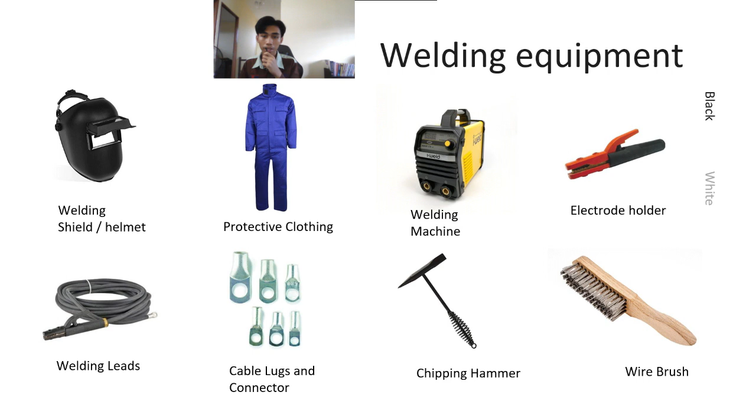So, for the welding equipment, what we need is first, a welding shield or helmet, protective clothing, welding machine, electrode holder, welding leads, cable lugs and connectors, chipping hammer, and wire brush.

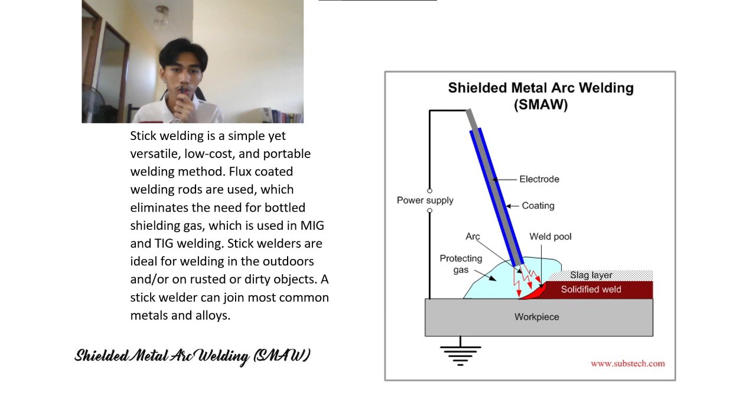So, what is shielded metal arc welding? Stick welding is a simple yet versatile, low cost and portable welding method. Flux coated welding rods are used, which eliminates the need for bottled shielding gas, which is used in TIG and MIG welding. Stick welders are ideal for welding outdoors and on rusted or dirty objects. A stick welder can join most common metals and alloys.

So, for the procedure, firstly, make sure the arc welder is in good and safe condition and the power supply can be used before proceeding with welding work. Next, switch on the power supply and then switch on the welding machine. And then choose the right current and polarity.

At the points where welding is to be carried out, the points are marked by the arc. The welding is carried out by contacting the electrode with the workpiece and then separating the electrode a suitable distance in order to generate an arc.

When the arc is generated, the intense heat so generated melts the workpiece under the arc and forms a molten pool. A small indentation is formed in the workpiece, and the molten metal is deposited around the edge of this indentation. And lastly, slag can be easily removed after the joint has cooled down.

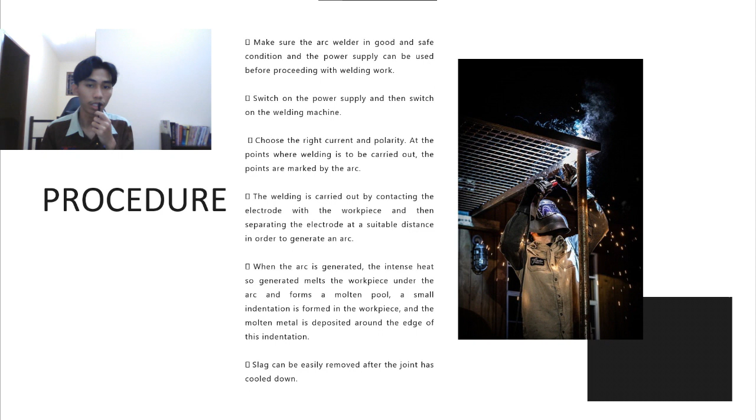So, the factors to consider when choosing the best stick electrode are: first, welding rod selection. Stick electrodes come in a variety of shapes and sizes, each with its own set of mechanical properties and operating with a specific type of welding power source.

When it comes to welding rod selection, there are several factors to consider: base metal properties, tensile strength, welding current, base metal thickness, shape, and joint fit-up, welding position, specification and service conditions, and environmental job conditions.

So for the base metal properties, the first step in selecting an electrode is determining the composition of the base metal. The goal is to match the electrode composition to the base metal type, which will aid in the formation of a strong weld. When working with a broken part of a component, look for a coarse and grainy internal surface, which indicates that the base material is cast metal.

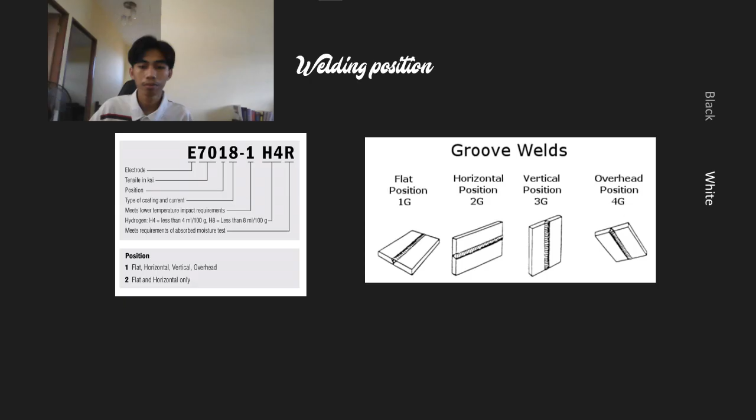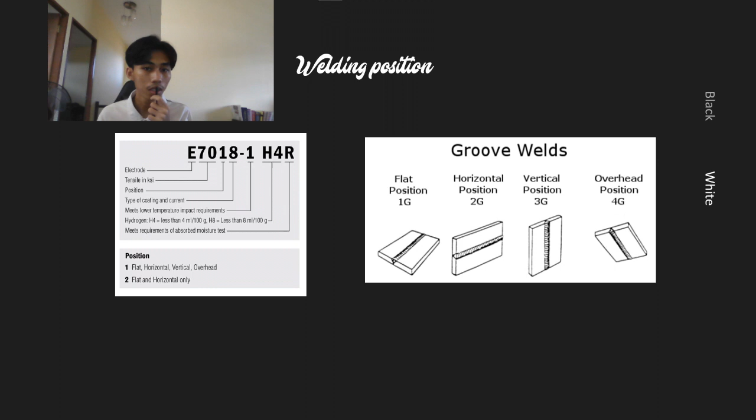Welding position. Refer to the third digit in the AWS classification to determine what positions a specific electrode is for. Here is how to figure out the qualified electrode position. 1 represents flat, horizontal, vertical, and overhead, and 2 only flat and horizontal. For example, a 7018 electrode can be used in the flat, horizontal, vertical, and overhead positions.

So, for shielded arc or heavy coated electrodes, around the arc. This welding electrode creates a reducing gas shield. This prevents the weld metal from being contaminated by atmospheric oxygen or nitrogen. Because oxygen readily combines with molten metal, alloying elements are removed and porosity is created. Brittleness, low ductility, and in some cases low strength and corrosion resistance are all caused by nitrogen.

They reduce impurities such as oxides, sulfur, and phosphorus so that they do not interfere with the weld deposit. They add substance to the arc, increasing its stability. This eliminates wide voltage fluctuations, allowing the arc to be maintained without excessive spattering.

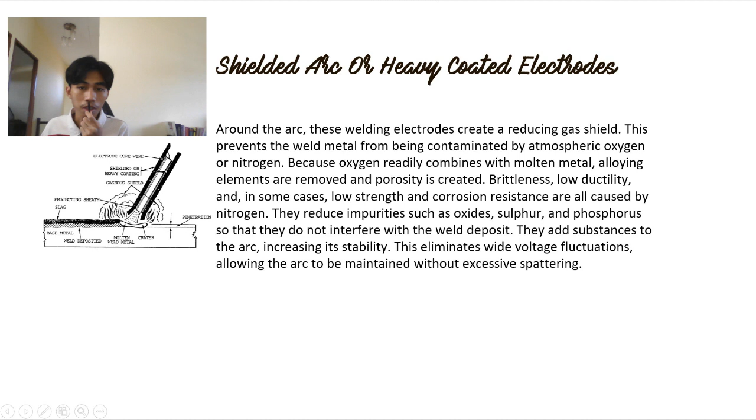Entrapment of gases in the weldment causes porosity and other cavities such as wormholes and blowholes. Internal and volumetric defects are the two types. Porosity is caused by weld metal contamination, the entrapped gas from a bubble-filled weld, which weakens and eventually collapses.

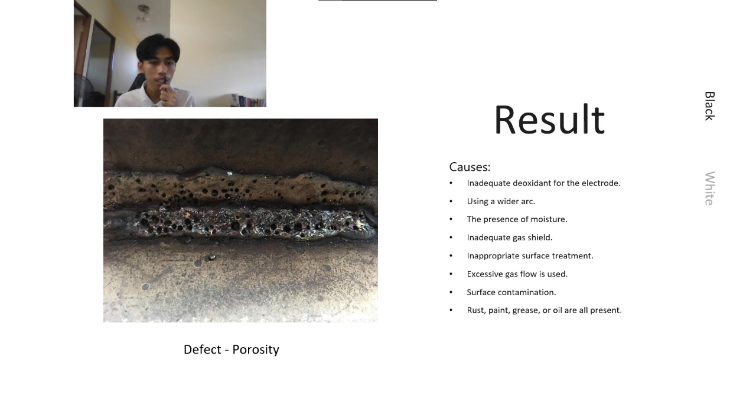Porosity is caused by a variety of factors, including inadequate deoxidant for the electrode, using a wider arc, the presence of moisture, inadequate gas shield, inappropriate surface treatment, excessive gas flow, and surface contamination such as rust, paint, grease, or oil. To prevent this defect, firstly, before we begin welding, clean the materials.

Next, dry electrodes and materials should be used. Use the proper arc distance. Examine the gas flow meter and ensure that it is properly configured with pressure and flow settings. Next, reduce the arc travel speed, allowing the gases to escape. Use the appropriate electrodes and use the correct weld technique.